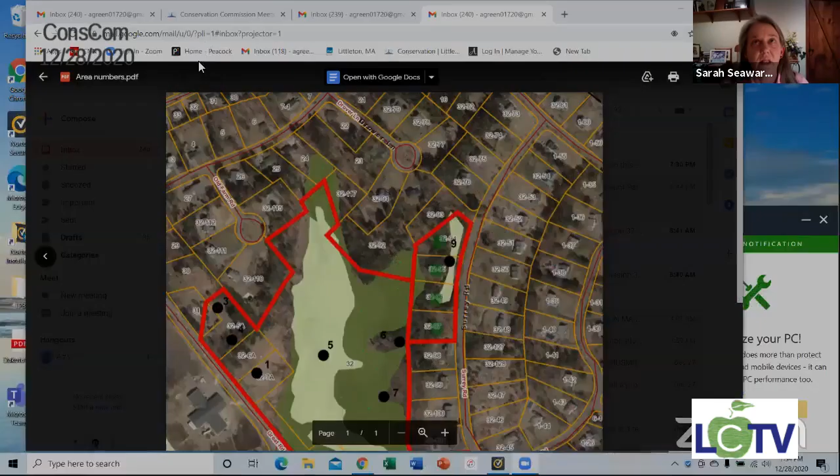Let me see if I... One question, Amy, on that top first page, it says the revision date was March of '17. As you make edits, can we maybe just put that at the last page of the document instead of the first? I like the format though, that's very helpful.

You can tell at the beginning I wasn't really doing findings per se, but once we got into it, I realized we probably should have some backup for that and try to be as consistent as I can be. And these are only the ones that were awarded, correct? The ones where you negated out, that didn't require those — sorry, yeah, I mean I skipped ones where there was no waiver involved. I think I tried to keep track of ones where they started with a waiver but then backed out. There were several of those where they were able to get out of the 50-foot.

I think it would be helpful from a data standpoint, and it doesn't have to be in this document, to have a kind of sidebar document of the ones that applied but were not granted.

Thought there was one or two in there that weren't granted. Okay, yeah, there weren't, I guess I thought there may have been more. I think the only denial has been basically for the vernal pool impact over at 10 Fort Pond. He's putting the driveway in.

Other people may have withdrawn or come in for an informal discussion. Right, and I don't think we need them. Yeah, I wasn't going to put those in.

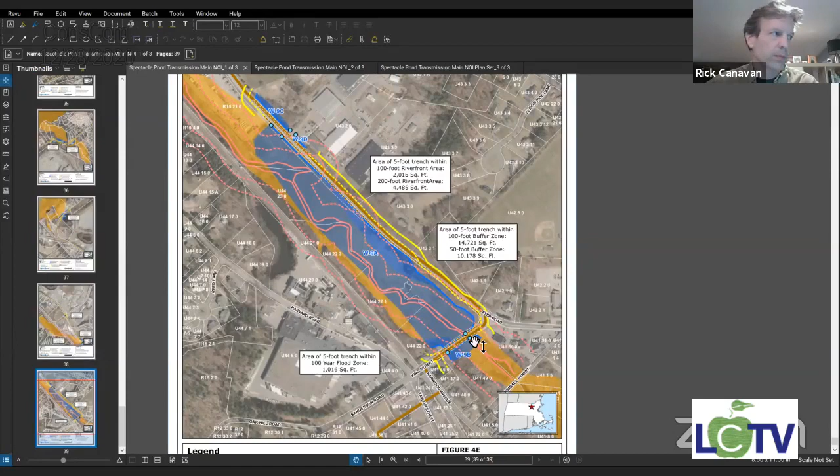You realize they've had a lot of trouble with the gas main along there, keeping that fixed in that area? At King Street? Yep, it's been a challenge over the years, I believe.

And the other one's gonna be getting underneath the railroad track somehow. Yeah, so the railroad tracks isn't a conservation issue, but it is an engineering issue. Like I said, I'm a wetland scientist and not an engineer, but let me get to that sheet for you.

There's an existing pipe underneath the tracks here. So this is to orient yourself and myself — coming off of King Street, there's the King Street culvert, sheet C108.

Oh sorry, well anyways, I'm messing up the match line, so I apologize for that. But there is an existing pipe underneath the railroad tracks that's going to be used — the new water main will be lined through that existing pipe.

You can see in the aerial it's close to the corner with King Street where the survey is showing those existing box cars, so there's going to be no excavation of the tracks. I'm slowly trying to get the trains — getting a closure for the railroad tracks would be very difficult, so they're very fortunate they don't have to deal with that.

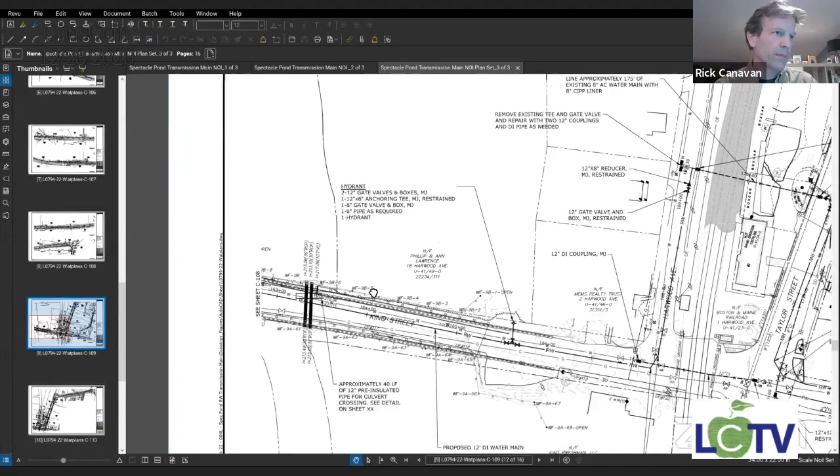And then, like I mentioned, there's portions of the project that are in borderline areas subject to flooding. As I said, that's all being restored to existing grade.

On 2A here, heading, the water flow will be heading south in this section. There's a pretty significant wetland, as you're aware, in this area, in areas where the project excavation is going to be, in the buffer zone or adjacent to wetlands. Even though that's exempt, there's still erosion controls proposed for the limit of pavement to make sure the excavation, the temporary side cast out of the trench, is controlled.

And isn't allowed to migrate into wetlands. Would it be better to be on the other side of the road?

So the erosion controls are on the water side, the wetland side of the road, but part of what they were having to avoid is the existing water mains. The proposed water main isn't this W line type, but it's the RW for raw water. So they are on the east side of the road in that case, further away from the wetland here. But the layout in the road is really dictated by the other utilities, as much as trying to avoid the road shoulder closest to the wetland.

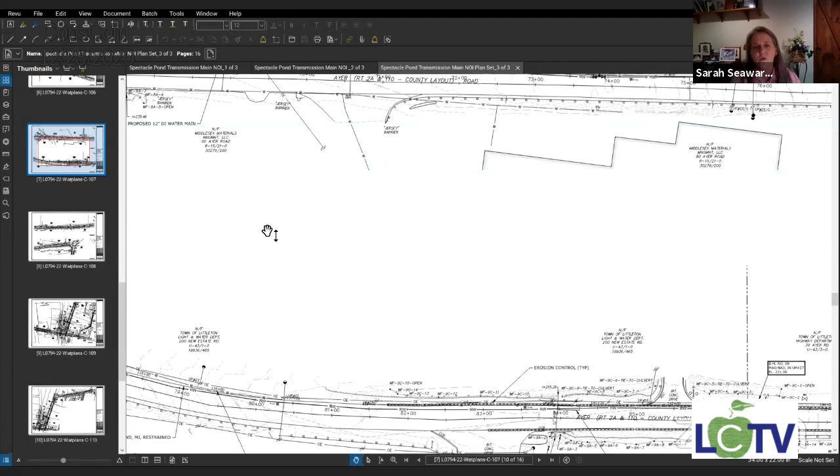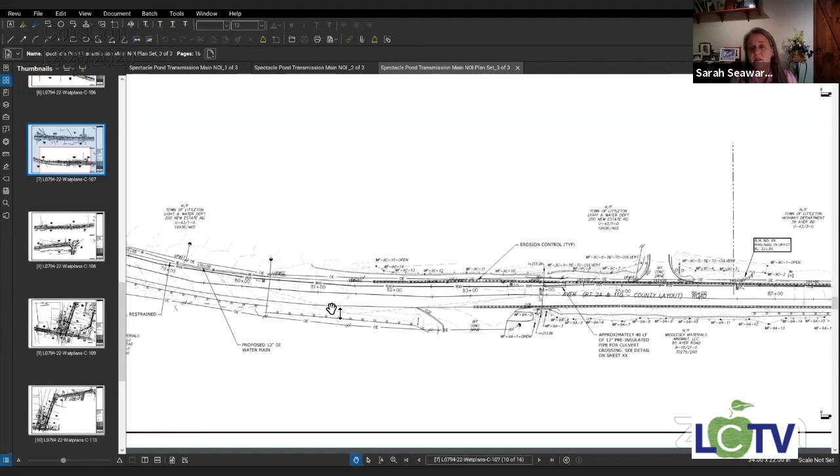Are there particular areas you anticipate seasonally having to dewater? Yeah, I think it depends on the season and the location. Certainly they're going to need to dewater to a treated upland area. I haven't read through the plan fully. Is that noted on the plan, in terms of how that mechanism would be used? Let's see what we've got.

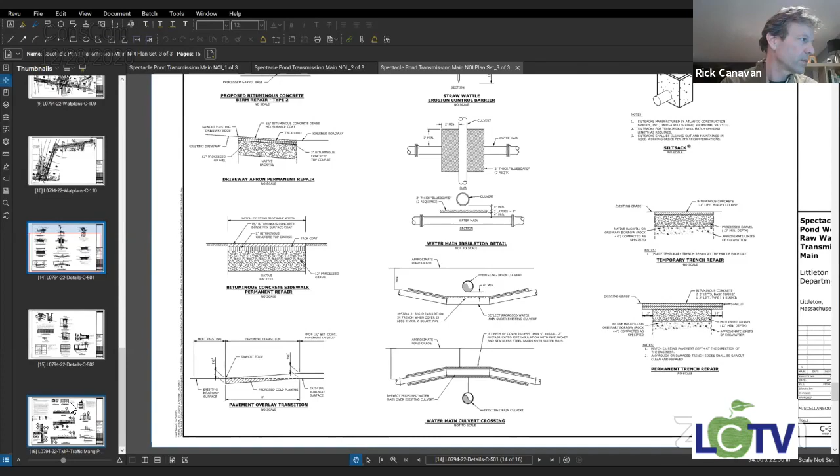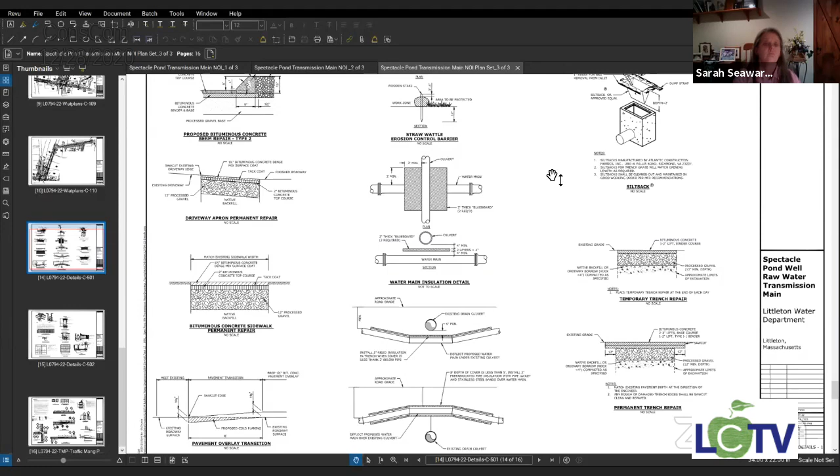This is a detail of the water main over the culvert, but let me see if we also have the sheet of E&S details... That's the traffic one. I know the narrative discusses that dewatering involves no discharge of untreated dewatering wastewater to wetlands. Obviously you want dewatering to be treated and discharged to a stable upland area, so that is in the narrative. The detail doesn't specifically include whether it's one of those geotextile dirt bag dewatering devices or a ring of staked hay bales to put your dewatering trench outlet into, or the outlet of your dewatering pipe. I would encourage you to at least put one or two on the plan, and that can be a field decision, but we'd like something on the plan with a detail.

Is any of this going to be like they did on 119? They did borings underneath the driveways and stuff so they didn't have to dig them up, I think, and they put that temporary pipe over from Spec to Beaver Brook Well.

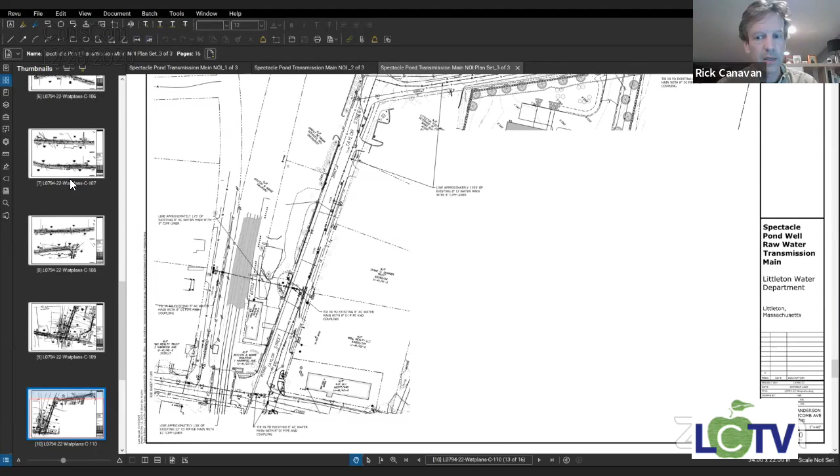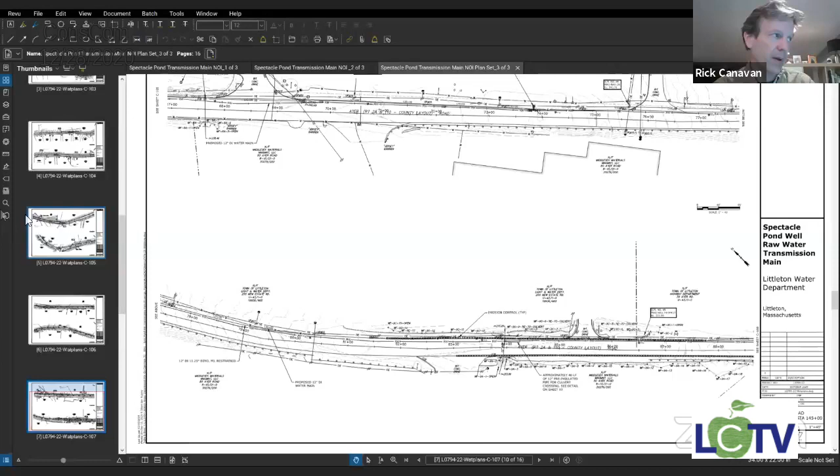If you mean HDD, horizontal directional drilling, it's whatever they did going under the drives. In some cases they did that. As far as I know, this is all trench and open cut, versus pipe jacking or the more elaborate HDD method where you turn your drill head and install a pipe, frequently used to put a pipe under an existing culvert or stream. I'm not aware that's proposed for any of this.

Any of the commissioners have any questions? There's no DEP number on this yet, correct? No. Anyone feel there's any sensitive areas they might want to see or review more closely? I feel like we all know the areas in question fairly well.

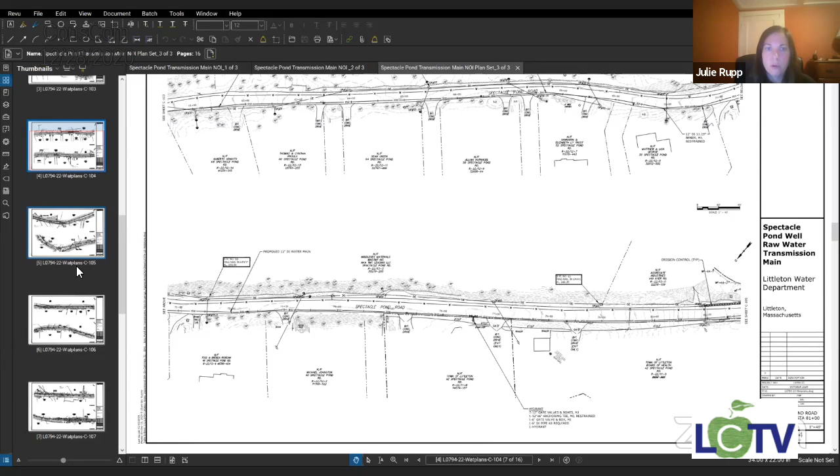Yeah, I could use a little clarification. It looked like where the pipe is coming out from Spec Pond to 2A, it's going to the south side of 2A, and then there's another sheet where it showed it on the north side. Is it crossing? It looked to me like it was heading out to 2A, towards Hartwell, Taylor, that area on the north side, but then one of the last sheets we looked at with Middlesex Materials, it looked like it was on the south side. So I'm just curious, because I was glad to see it on the non-wetland side of the road, since we've had sloughing and issues with DOT recently.

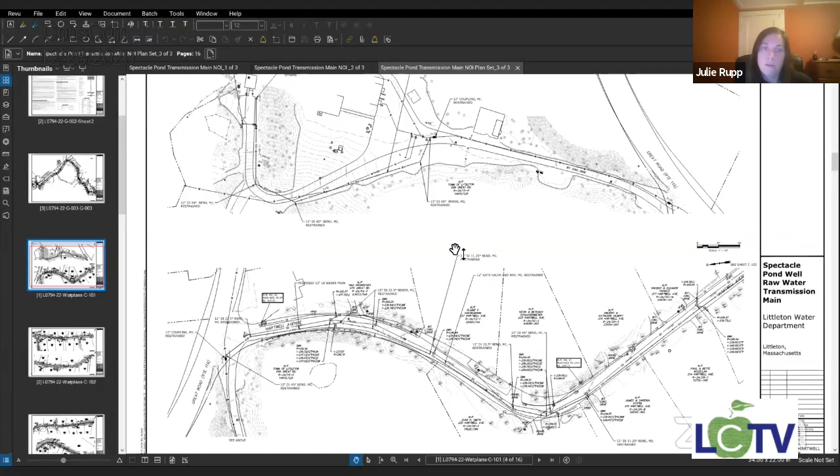Right, so if you want to follow along, here's... and maybe you can help. I'm overdue for glasses, so I apologize. I've brought us up to the north end of the project site, and maybe I've gone too far. If you wanted to look at something in the middle...

It's not really oriented through the internal site drives of the facility up at Spectacle Pond, but as it's moving south, the roads in this section are a little more narrow, and you have the issue...

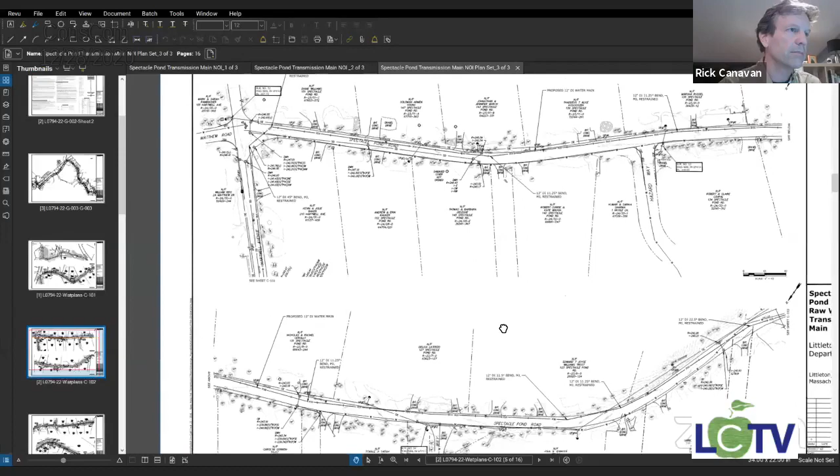I'm trying to get to, I think it's maybe this next sheet, where this is the other crossing in the plan view on the plans instead of the GIS map. So the raw water line is avoiding an existing water main here. It's more to the middle of the road because there's wetlands on both sides, and that's something you're kind of stuck with, trying to avoid the other utilities. In this case there's both drains and a water line, and they're splitting the difference, staying in the middle of the road.

So the design decision of where in the road the line is going is avoiding existing stormwater drains, existing water line, as well as trying to avoid wetlands, and keeping the geometry of the pipe feasible to build. So the bends, it's better if they're not very sharp, trying to make the radiuses work. So all those were factors in the decision of how the layout of the pipe has been designed.

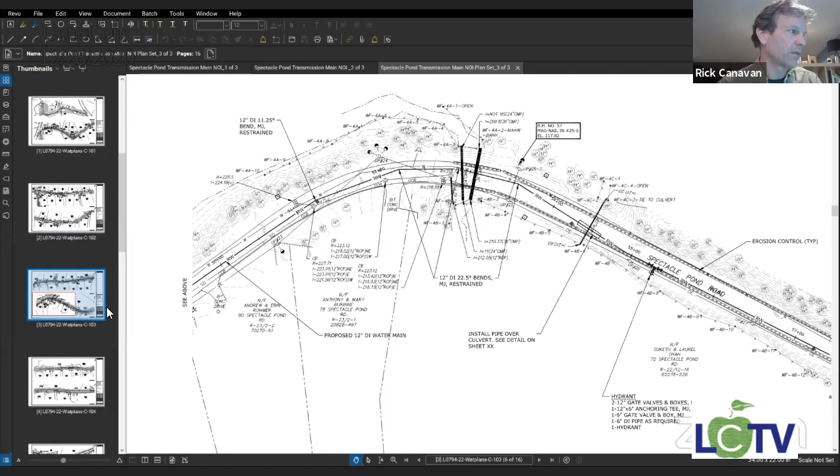I'm not sure if this is still the area we're looking to see, or if you want to help me get to the spot you wanted to go to. Yeah, I think I'm more just curious about the 2A crossings and where you are on 2A relative to the large wetland there and Middlesex Materials.

Did I miss that? Actually the explanation you just provided was helpful, because it looks like a road crossing is just kind of a diagonal across a road rather than a 90-degree type of thing. Yeah, that's like the hydraulics of water flow in pipes, which again I'm not an expert on, but the more shallow the angle, the better for the flow in the pipe.

Yep, that makes sense. Hi, Rick. Just joining you. Hey, Lou. Sorry. That's all right. So Lou, this is Lou Soracco, who's an engineer with Tighe & Bond. Lou, I was just pretending to know about fluid dynamics and pipes and why you'd use more shallow angles, but...

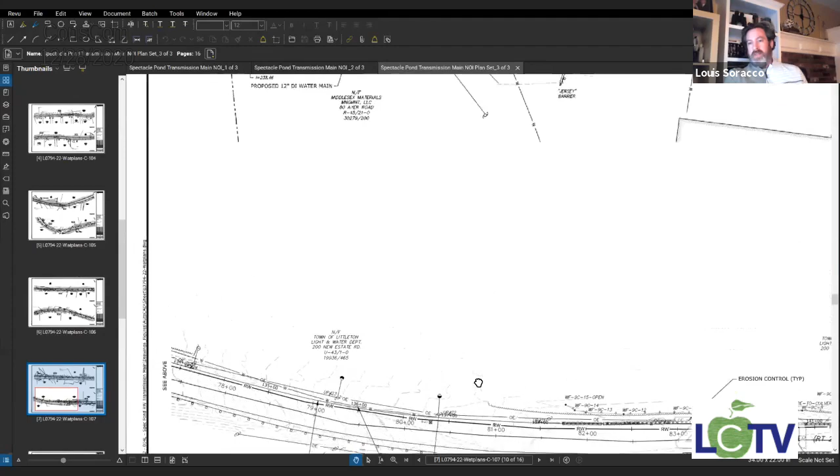Sure, yeah, no, you're right. The 90-degree bends, we don't really use those in buried pipeline applications if we can avoid it, because there's a lot of head loss through 90-degree bends. You get a lot of thrust at those joints, so you need larger bearing surfaces to make sure the pipe doesn't shift underground. So for a variety of reasons, we limit the bends to 45 degrees. When we need to go around something, we'll use a couple of 45-degree bends. There'll actually be less of a hydraulic impact using two 45-degree bends than one 90-degree bend, so from that standpoint we'll avoid that.

Underground, they come in standard 45, 22, 11-degree bends. And then each pipe segment itself has a certain degree of flexibility where it connects to the next piece of pipe, so you'll get a couple of degree bends just by connecting straight pieces of pipe together. A lot of times you can bend around objects without putting bends in the ground, it just depends on if you plan far enough ahead and how exaggerated the bend needs to be.

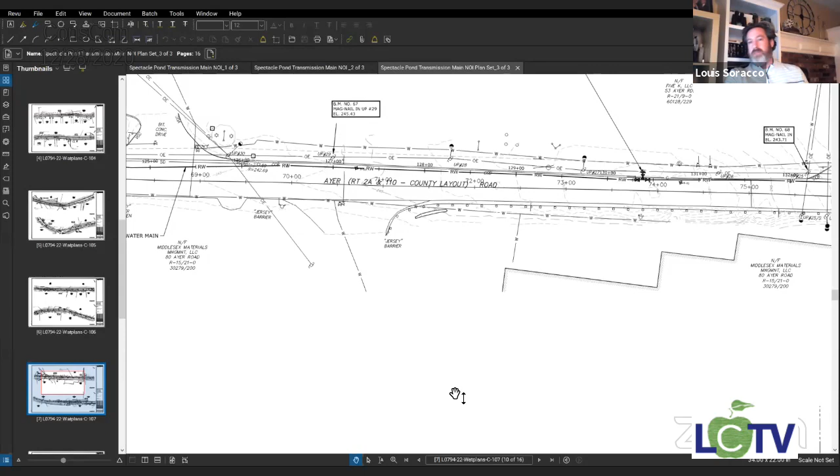But we usually show a number of bends in our designs so that the contractor is prepared to install them if they find conditions are different in the field and it's more easily maneuverable without bends. We can make that call in the field, but we try to conservatively show the number of fittings they'll need to make the installation occur.

What size pipe is this, by the way? It's all 12-inch ductile iron pipe.

Your plans show you mentioned thrust blocks. They're all precast? Is that what your plans are showing? Yeah, the water department is kind of standardized on precast concrete thrust blocks, so they would like to go with that wherever possible.

I had one other question about hydrant installations. There's a detail for that. Are there hydrants being installed along the line, or only up to the start?

I didn't catch the whole question there. It sounded like a question about hydrants. Is that right? Correct, there are a number of hydrants. They're not being used for a typical hydrant purpose. This is a raw water transmission main, so the hydrants are there mainly at high points to help release air. When the pipeline is initially filled, we need a place to evacuate the air out of the line so we don't create an airbound situation with an air pocket in there. And at low points, there's a couple of low points where we just want to be able to flush out periodically. But for the most part, hydrants really aren't needed, and the pipeline isn't really even under pressure unless the well is in operation.

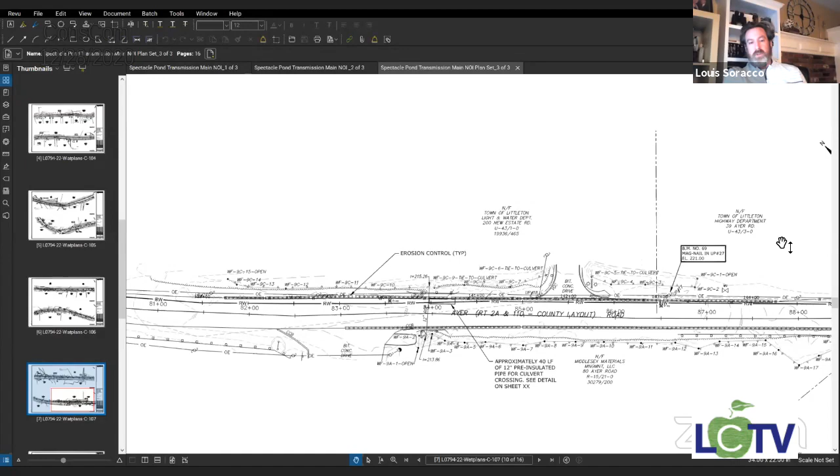But they will be standard type hydrants where we do have them, but they'll be painted a different color so that they won't look like the normal ones. They'll probably be painted black so that they're not confused as a regular hydrant.

Mr. Chairman, I'm not sure, you might have some people in the public with a comment. I don't recognize everybody out there. Yeah, I guess we should speak to whoever would like to talk. Nope, I guess not.

Okay, Rick, are you impacting any trees? Or it sounds like it was mostly or all currently under current paved surfaces? How long do you expect to tie up the roads?

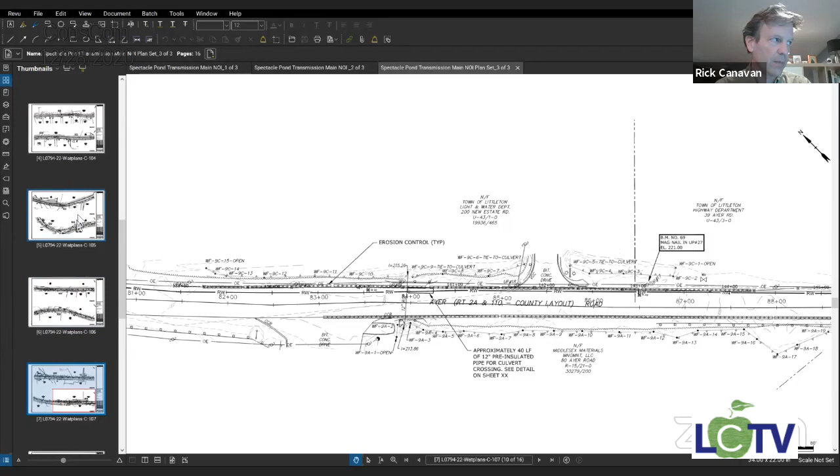Lou, can you confirm, as far as I'm aware, maybe the only place there could possibly be any tree impact is this initial section out of the well at Spectacle? Are you thinking any kind of clearing? No, there'd be no need to take any trees out around there. There might be some low scrub, but nothing substantial that would require a large amount of specific removal. There's room enough where we've shown it to avoid any significant tree clearing activities.

Otherwise, construction equipment access should be occupying the same space that you'd need to clear for the road itself. I know the water department is scouting out a few different areas for staging purposes along the route. Obviously this is one of them, their own property here. There'll be an area at the other end. There's their office that's in between along the way that they're going to be used. And I think they were going to speak with the town to see if there was any area in or around the transfer station, to try to give them different points along the way to store materials for staging purposes.

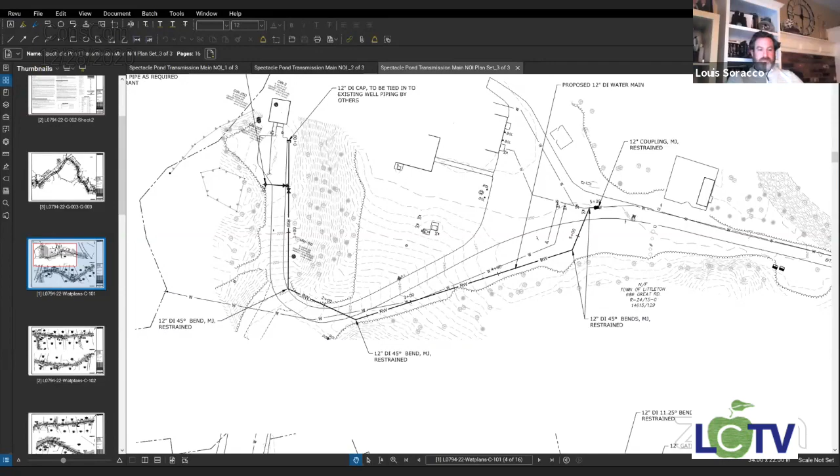Okay, thanks everybody. Continued public hearing request for amended order of conditions, 93 Matawanakee Trail, U4725-0, Mass DEP file number 204-876. Who wants to speak to this one?

Well, I think we can do an update. After the last hearing, Amy and I went outside and met with the owner and took some photos there. It had been a while since I'd been on property, so I was personally surprised to see how close it was to the water. I'm not sure, Amy, if you have any photos to share, but I welcome other commissioners' feedback on that. I saw the numbers coming through on the 10-year storm, and I feel like presently we get 10-year storms in the spring and summer quite often, so that is certainly a concern of mine. I think the original intent was that we were going to really be able to absorb more naturally through not having pavers and everything there.

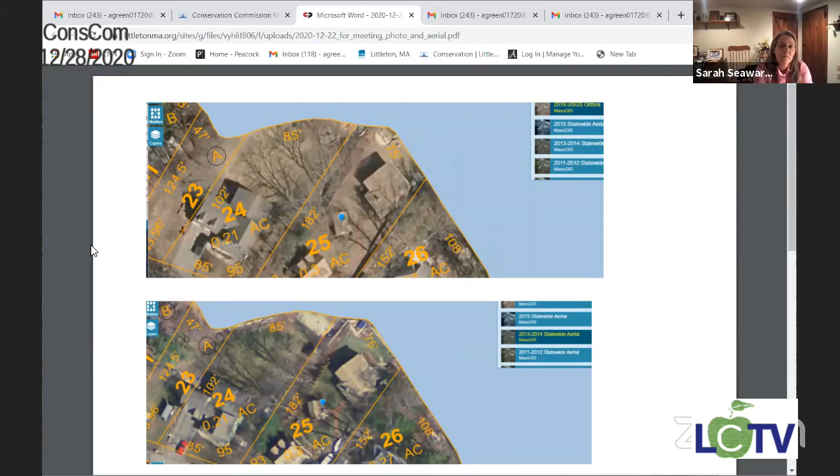So this aerial, let me think about this - the top one, where am I? This is existing conditions. Up here you can see the pavement, and this was before anything was done - you can see the lawn in there. So that's the change, and that's just sort of a reference photo.

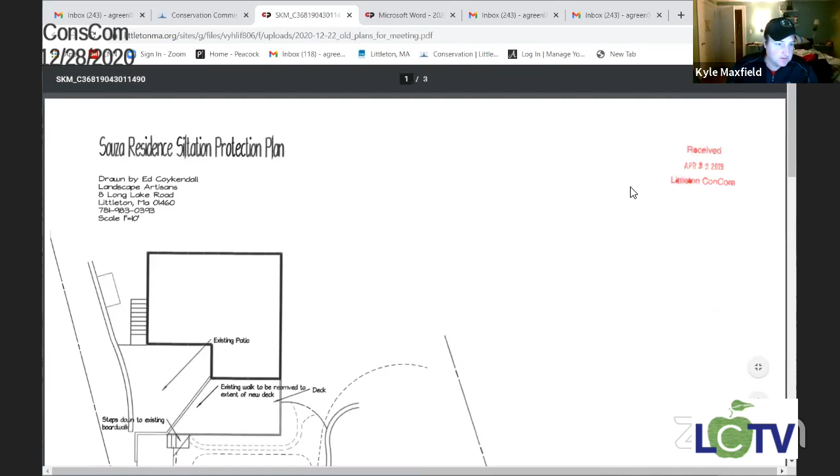Can you remind me what the plan was? From what I saw when we walked out there, the plan was a wood deck that wasn't supposed to extend as far as this patio, correct? Kyle, your audio is not working wonderfully. So this is the approved 2019 plan - here's the lake at the bottom. This is what would have been the rain garden, and the new patio is in here.

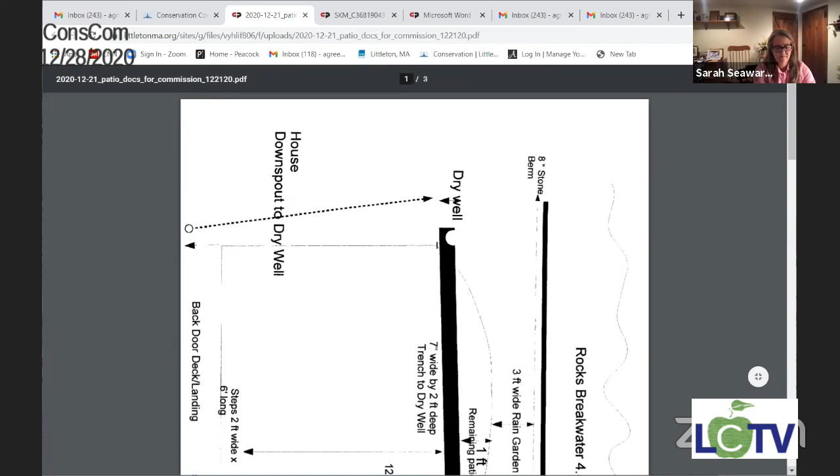So how much bigger is it than what the original plan was? Well, I think it's not that it's bigger, it's that it's different, Jim. It is closer to the water, and the rain garden is half the size. Just trying to find a picture from that day. Mr. Souza took these dimensions after Sarah and I walked it - the rain garden as built is about 3 feet wide, with about a foot to the patio, and then the patio up to the house. Then the scale is kind of useless because it says 1 inch is 10, but I don't know what 1 inch is on this. Definitely a lot different than what we were permitting, as far as I can see.

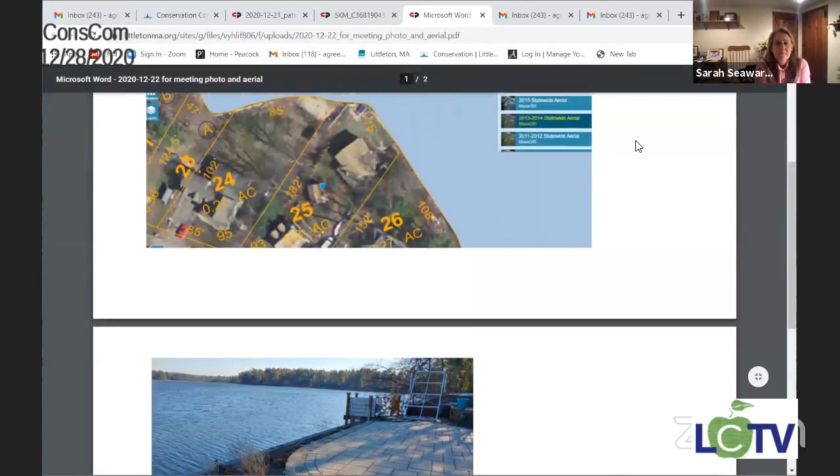I also noticed that on the opposite side of the property, there's a direct discharge flexible black pipe that has a direct discharge onto the beach as well, on the further side of that deck. I thought I had sent a picture of that - I was just looking to see that now, and I thought we had addressed that in the filing. I did not see that in the original filing. Sarah, do you know what the origin of that pipe is? Well, maybe the applicant can speak to that, but it's drainage.

Well, it's also roof runoff, right? Isn't there a leader from about halfway up? Yep, you could see the scouring, and that was not after rains. The flexible pipe is connected to the downspout off the side of the house. So you're getting good force for sure.

Other commissioners have questions, thoughts? So the edge of the patio, it sounds like it's now 4 feet from the lake instead of the 8 feet that we had talked about when we permitted the plan. Is that accurate? I think I saw you nodding your head.

Yeah, I believe that's accurate. Okay, yeah, and so that was my concern when I saw the photos with the edge of the patio and the garden. And then the other concern is that it's pavers, which is very different from the decking that we permitted.

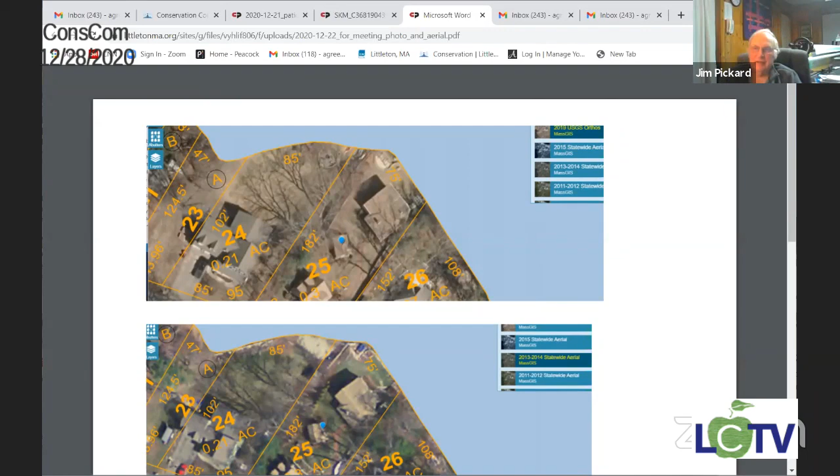What is your recommendation? Take it out? So could I ask a question? So preventing the stormwater from reaching the lake at all is not sufficient or not reasonable in your view? That that was the intent of the trench and the dry well, was to basically prevent any stormwater from reaching, even reaching the rain garden.

And I would be taking out some of the patio in order to put the trench in. So the patio would be a little bit less towards the lake because I'd be taking some of it out. Right, so I guess I made a mistake and I'm trying to make it right. And it sounds like I'm failing to do that.

The issue is that the current project, even with the stormwater infrastructure, never would have gotten traction. And if your neighbor comes to try to do this, it just never would have gotten traction. And again, what we permitted is not at all what's existing. I understand.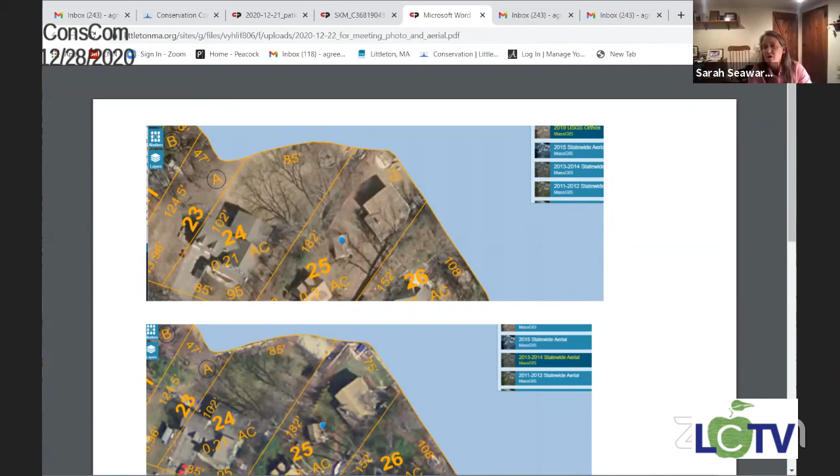Other commissioners want to speak and share their thoughts for Mr. Souza? I'm sorry, say it. No, we're just asking Mr. Souza for other commissioners to comment for you. Okay, yeah, unfortunately, I'm on this one, not unfortunately, but I agree with Julie. I wasn't around when this got permitted, but I can't.

You're just still looking at the proposed plan and looking at the rain garden that was proposed. Even if you would put in a patio mistakenly instead of the wood deck, the rain garden itself wasn't even built to what was on your plan. So we're losing, never mind just infiltration, just the habitat and the top pollinators that you would have put in there. I don't think you have even the room to recover from what was on this proposed plan, other than to remove more of that patio.

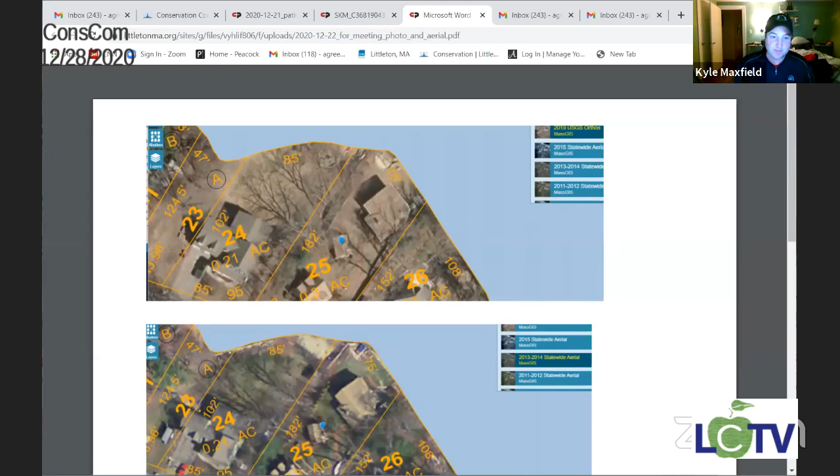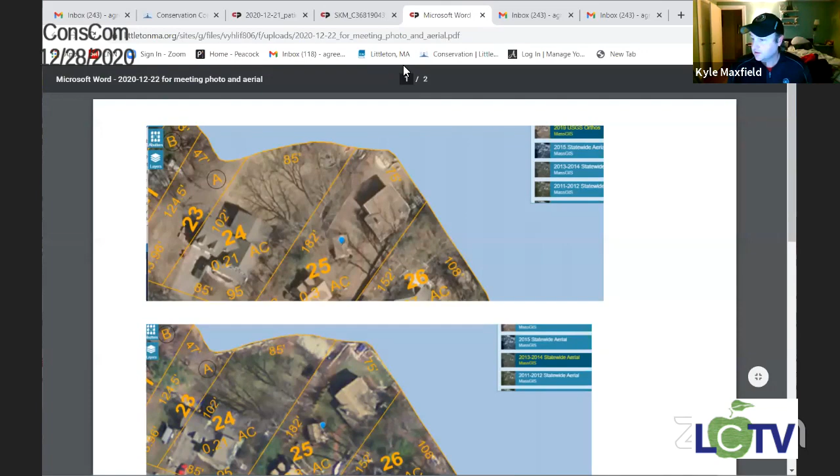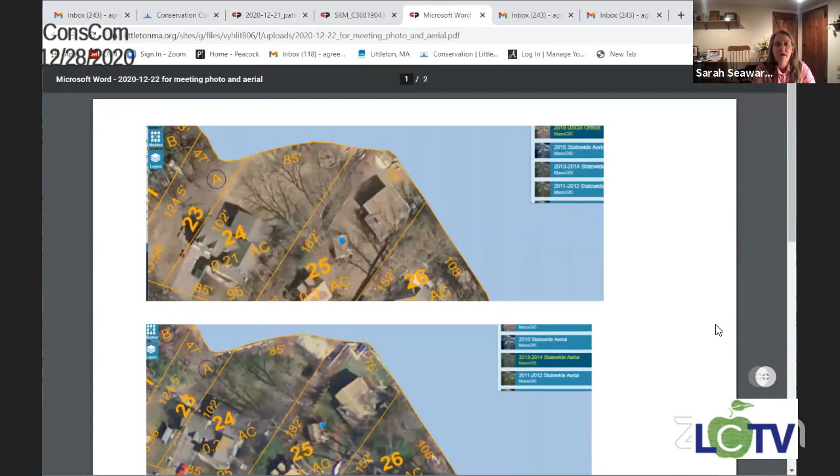But I mainly agree that I don't see that initially we would have approved a full paver patio, especially covering that much area of lawn that was pre-existing. I think my hope had been that there would be more infiltration in its original state, without having the pavers there. I just think that our storms are getting to be so ferocious that the water's just going to bounce right off it, that we wouldn't be able to accommodate it. Even looking at the numbers, and I appreciate you sending the 10-year storms, I don't think that we can accommodate that even on this site.

So what is the solution? Would it be possible to maybe remove a portion of the patio and increase the size of the rain garden a little bit, along with maybe some additional drainage? I think you'd have to remove the majority of it, Andrew, to even get back to any type of true infiltration. So I agree with the other commissioners, it wouldn't have been permitted.

I think there's an ongoing issue too with when you inevitably get vegetation growing up through the cracks in the pavers. How do you deal with that? Are you going to be on your hands and knees removing it, or is someone going to spray vinegar or herbicides? So that's an issue as well.

That's one example of why we wouldn't permit this type of surface this close to the lake. And really, the only reason that anything was entertained at all was because it was decking on posts with drainage through. Yeah, that's a good reminder.

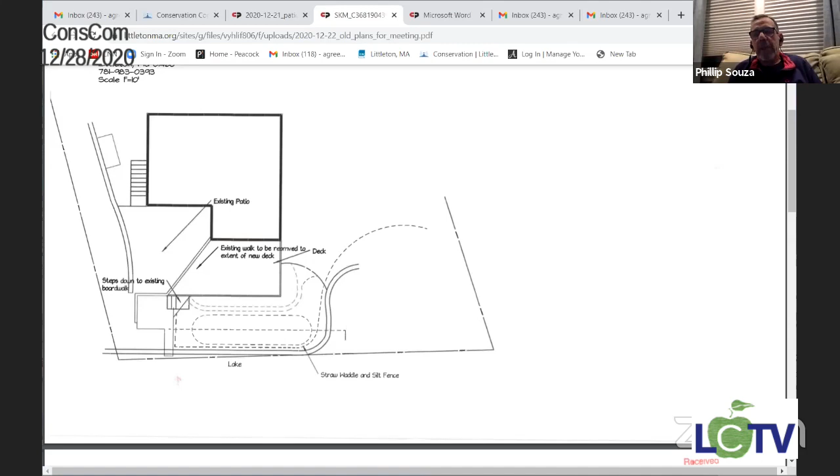Is there a way to avoid tearing the entire patio out and instead of every other paver having a drainage site, including the trench in front, the rain garden, and the dry well, so that instead of a stone paver there'd be grating where the water would flow into, as well as flowing into the trench at the end of the patio?

I think what you're hearing from the commissioners is that more than likely that too would not have been approved, because it would have exceeded what's allowed — that would have required a waiver.

We went around and around on this to get it so you could have the wooden deck. That went on for a couple months. That was what was proposed. Correct.

So we need to move forward on this to give Mr. Souza some guidance. We have a few options put out this evening. What would commissioners like to do? We need someone to make a motion. Sarah, do you want to make a motion to have an enforcement order issued?

I think, while Mr. Souza, that sounds extreme, it does give the commission an opportunity to work with you in terms of pulling it out. Our concern is that if we do not put an enforcement order on, we have very little skin in the game to make sure it gets done properly.

But we are very cautious to set precedents here — this would not have been permitted so close to the water. If you were 100 feet back, or closer but past the 50-foot line, that would have been a different discussion. But you are so close to the water.

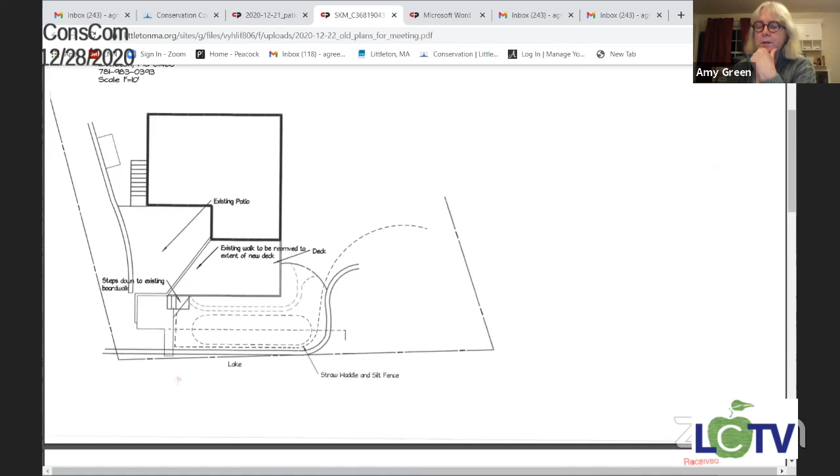Yes. And before you vote, I'd also want some clarification on the timing. I would be a little leery about ripping this out in the winter. I agree. What do we benefit from trying to pull this out while the ground is starting to freeze?

Personally, I'm more in favor of just leaving it alone because it's going to wash out. That's my opinion. I agree. We would leave it and readdress it, to have dialogue, say the beginning of March, so that we know going forward we have a plan.

And in the meantime, can we discuss the plans with Mr. Souza? I think we also need to talk about erosion control, and about that downspout from the drain, because that's going directly onto the beach. We need to try and slow that down.

But in the next couple of months he should be getting his plans together, with a contractor lined up, because there's going to have to be a new plan with erosion controls and what that's going to look like afterwards. So Amy, is that motion clear? It was obviously not for the deck, but for the patio.

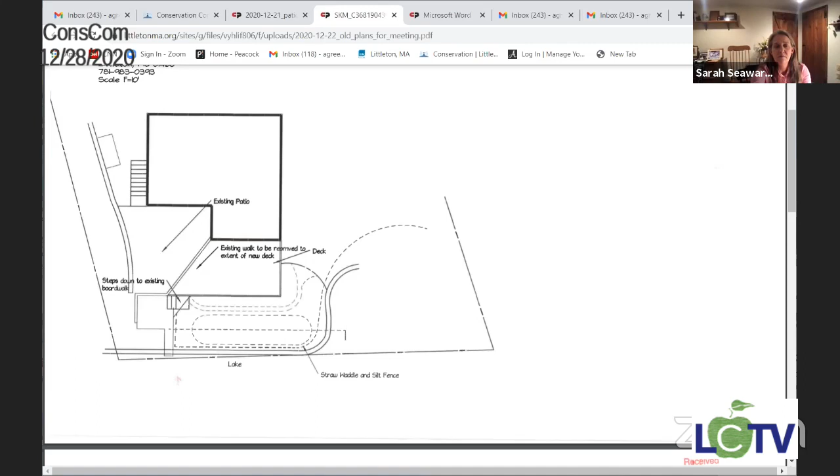So, Brad, you want to do your roll call vote? Sure, one sec. Trying to remember who we all are. Yeah, I'm trying to find the order. All right, you probably moved it. Yeah, I moved it, one sec.

So the plan really is going back to the original plan, and at this point the staging is probably the most important piece of that — how to get there. All right, Brian, we're ready. Yep, I'm just bringing it up, sorry.

Okay, so we have roll call to issue the enforcement order. Melberg is absent. Sarah Seaward, yes. Kyle Maxfield, aye. Brian Crowley, aye. Andrew Samarco, aye. Jim Pickett, aye. Julie Rupp, aye.

Moved. Okay, you issue an enforcement order.

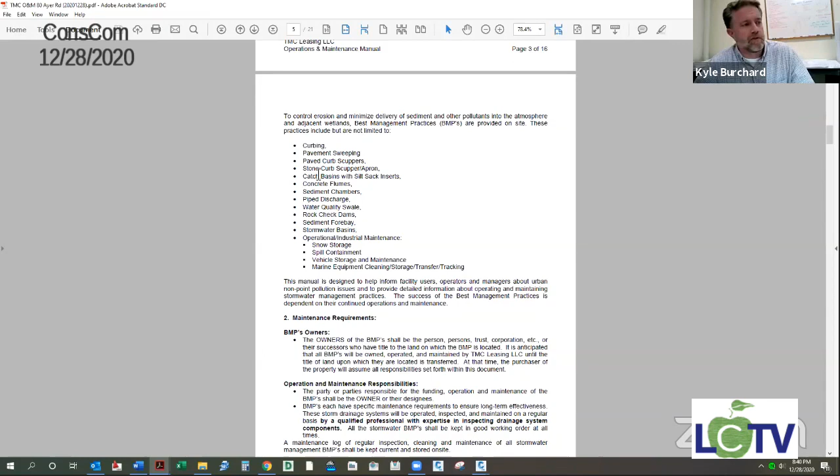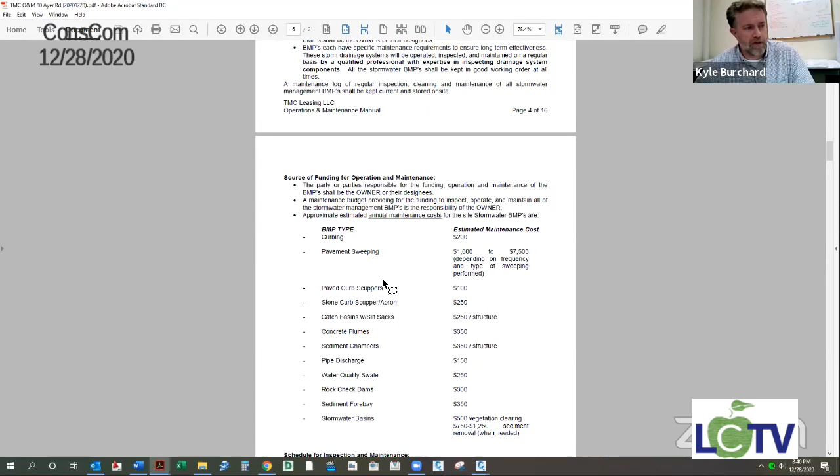We talk about all the basic components of what helped this stormwater system to function properly and clean the water as it runs off of this industrial property. There's a whole host of different items that we've identified, as well as some practices for best management of the site. We have an estimated cost of the annual maintenance of these BMP facilities and a schedule that will also align with the multi-sector general permit requirements for minimum of quarterly inspections and annual reporting. And of course, there's maintenance as needed at various facilities, which will be based on the inspection schedule.

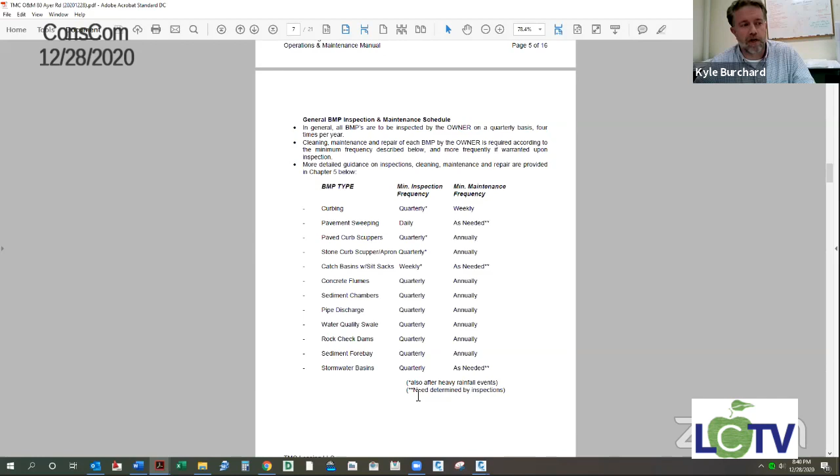I understand that the commission hasn't seen this, and I appreciate the accommodation to just walk through this very quickly. Stop me whenever I can answer any questions.

First and foremost, I'll just point out number 12 is the snow storage area. I think that the facility manager had worked with Amy a little bit to identify these areas outside of the buffers, the flood zone, the riverfront, to be able to provide snow storage up along Ayer Road. That's typically how they've done it, and that's currently how they are continuing to do it. Now we've included that in this O&M just as a mention for one of the items that try to help make this facility run in a clean manner as it pertains to stormwater runoff.

So we have a number of different pieces of infrastructure that go into the existing stormwater quality system that's on this project. If we're oriented to where the concrete batch plant is on the property, there are a couple of concrete flumes that have grates on top of them, separated by a well of sorts, a sediment chamber, if you will. This one is somewhat shallow, but then it overflows into another concrete channel before being piped through another chamber. And there's a host of other chambers right before we get to the existing detention basin that's out there.

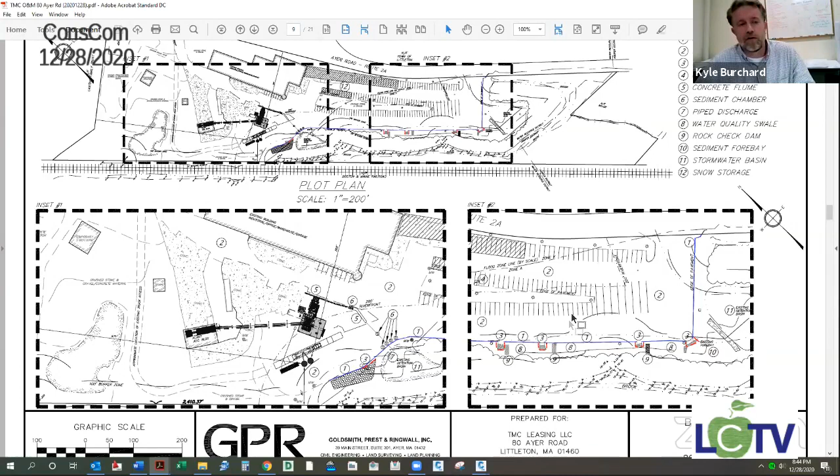But also just note, curbing is the number one item listed in this, as this entire barrier along this southwest edge of the property is a major component of maintaining the proper water quality runoff from this site. So making sure that the curbing is in good shape, that where it's scored or broken or cracked, that it's replaced. We also know the new installation of curbing along the Jersey barriers adjacent to the existing detention basin is also part of that maintenance schedule.

So we have the curbing that's controlling the water at specific points to get off the pavement. There will be wattles or silt fence there to capture the coarse sediments and debris, making it more convenient to remove before it then goes through the water quality swale and the rock check dams to get to the existing forebay, spillway, and existing detention basin. So that's one system on that end of the property.

In this middle section, where arguably there could be more runoff from the concrete batch plant, the aggregate building, and where the proposed scale and silo equipment is going to be placed, again there's a scupper to a stone apron where there would be a place for straw wattles and or silt fence to be placed to capture the sediments before it crosses again across another filtration mechanism in this stone apron to then get into the detention basin.

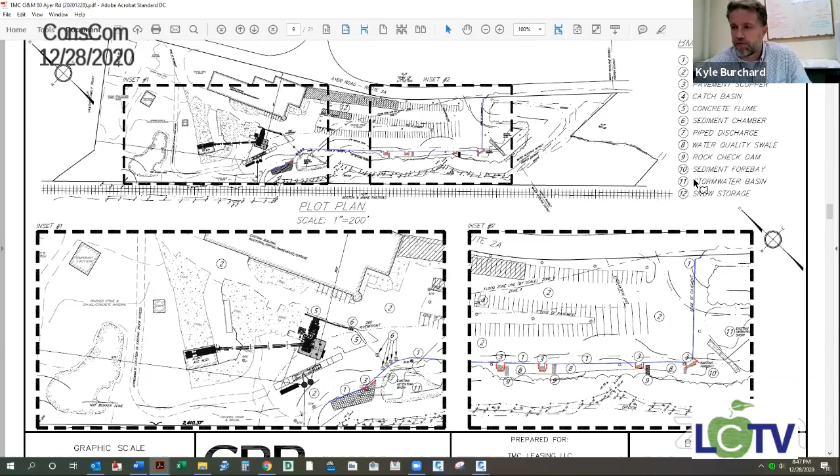So we would be proposing also to do some sediment removal as part of the maintenance of these basins, that's been added into the O&M plan. So with that, I think I'd like to see if there's any questions from the commission, looking to move forward to try to help our client get to construction. There's this process for building permits and so on. Like I said, also the multi-sector general permit is something that we are also advancing to get submitted to the EPA.

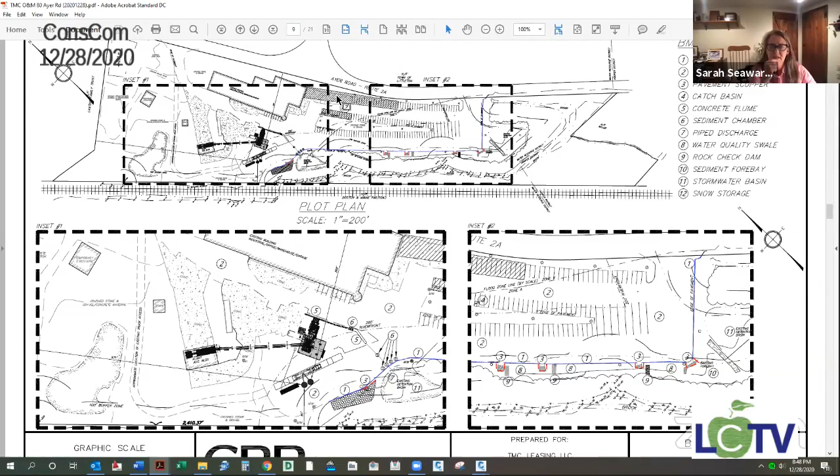Okay, Kyle, I have 3 questions and they start in the order to which you shared for snow storage. If you can go on there where it has number 12, where the snow storage is. Can you remind me where the fueling is of the trucks that are there? Isn't that where the 12 is? Aren't there some pumps there for fueling somewhere in that area?

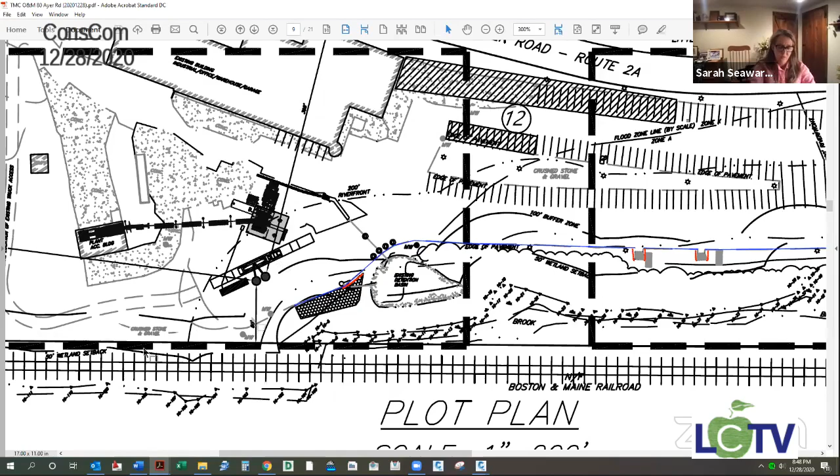There may be. I don't know that those are active. Okay, if you could just let us know if those are active or not. And then as we go over closer to your batching area, I guess I still get a little conflicted because we talk about it's fairly efficient, but then we've been on site numerous times and we really do see quite a bit of surface overflow kind of coming down between 5 and 6. And I think we've talked with Bruce about that, the previous engineer. So that's definitely a concern of mine. We saw that on some of our site walks.

I just want to clarify, if I may, the 5 and 6, are you saying sheet flow? Just in that general area, Kyle. So I was just trying to make it so when we were there, we could see, we were there during a rainstorm and you could just see the sheet flow across the pavement coming down to this point. And I think, Brian, that was the day Brian and Kyle, we were all there with Kevin, that we saw just the water just kind of cascading down over the parking lot. So there is sheet flow.

There is sheet flow that happens in this area that brings it to this point, which is, I think, why there is a break in the Jersey barrier and then a stone apron to allow for a stable transition for that water to get out off the pavement and get into the basin.

And that's its function. Looking at it, it's fairly flat across here, and I recognize that. I think that may help in slowing the water down as it gets off the pavement, and providing a measure of pre-treatment effectively with the wattles that are going to be placed, or the silt fence that's permanently stationed at this break. So I agree.

There's flow that occurs here. I'm not sure, so I guess to clarify, are you saying the permanent solution for this will be erosion control? Well, the permanent solution is that erosion control is a standard measure to protect the BMPs at the transition of the water off of the pavement. There's a large stone area here where that takes place, and then that transitions and conveys into the basin.

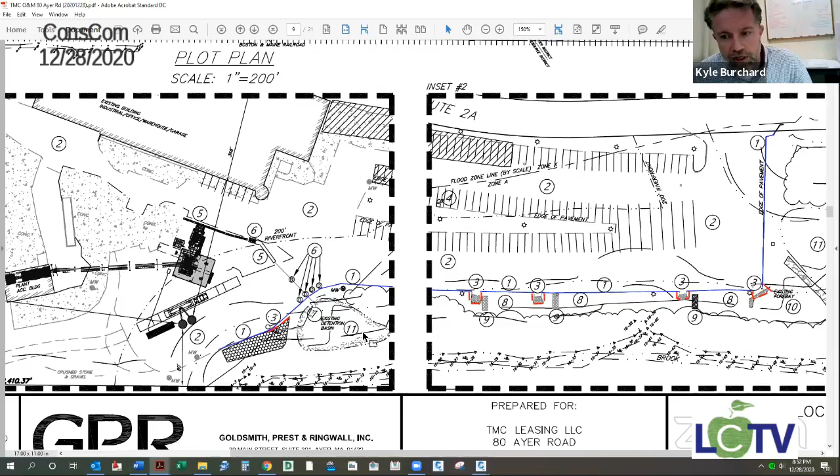Okay, thank you. Do your BMPs have a threshold? I know we went through that list fast, timing and whatnot. So I'm sorry, I can't understand what you're saying. How frequently do those basins get monitored for sediment? The way we've set it up in the O&M is, I think, on a quarterly basis. Stormwater basins will be inspected quarterly and as needed.

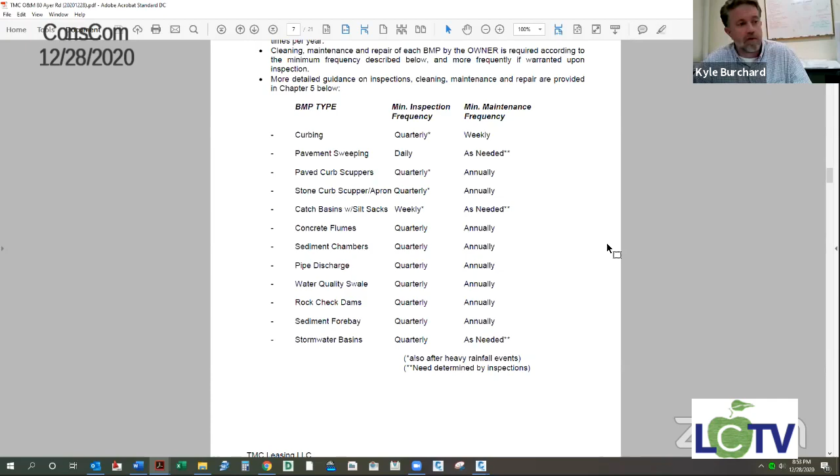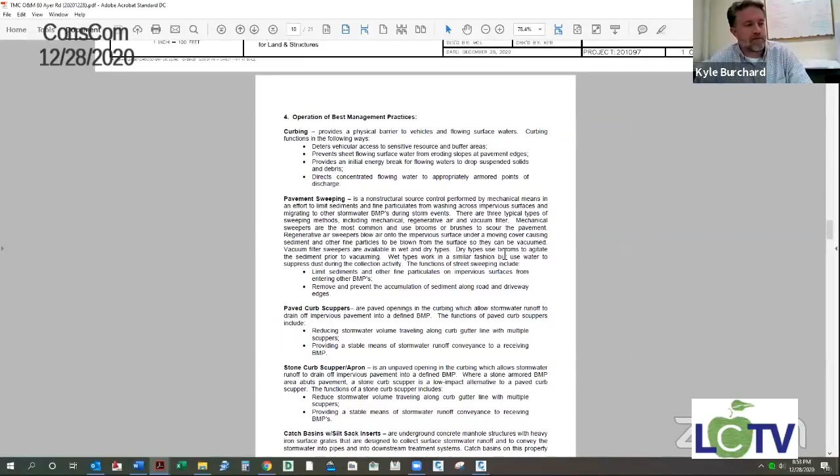So does it need it now, or in the very near future, conditioned perhaps to be done in the spring? And what is that threshold that it would need to be done at? I imagine it's not a foot. Well, I think what we're calling out for is to have it done when there's 6 inches of sediment that might be collected over 3 months.

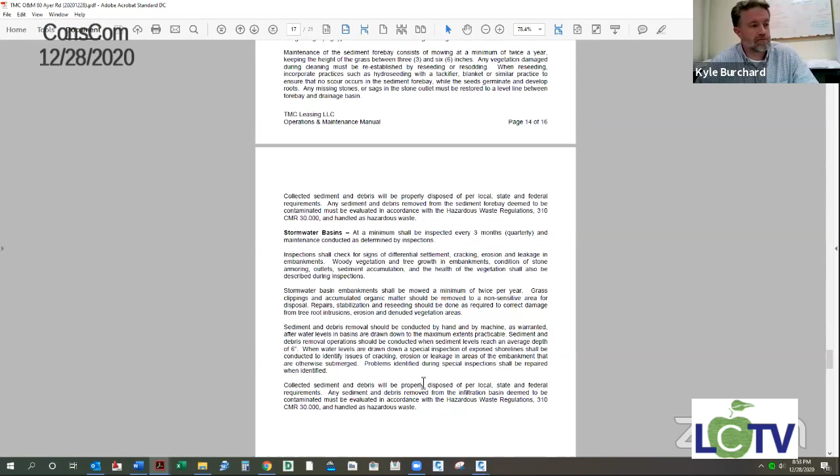When you say sediment forebay, you've got 3 to 6 inches, right? Keeping the height of grass at 3 to 6 inches. But I thought you had 6 inches, Kyle. We have 6 inches in the sediment basin, so when we're detecting 6 inches of sediment, that would be the trigger to move the sediment out.

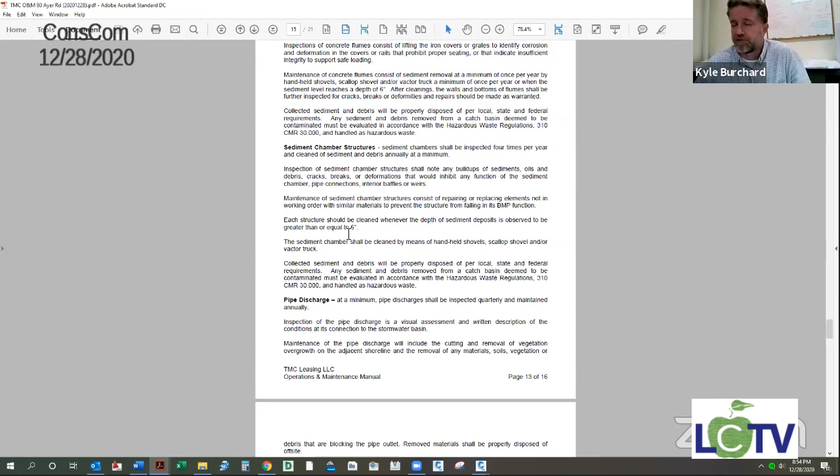We also have 3 to 6 inches within the sediment forebay that goes to the south basin. And I believe in the sediment chambers as well, another 6 inches. So we're trying to keep that level down to roughly 6 inches all along that pathway. There may be more frequent cleaning in the sediment chambers leading to that, or in the water quality swale and forebay that go to the southern basin. That seems like a reasonable amount of monitoring to keep that at bay.

You said it, but I want to emphasize it. There's no reluctance to clean out these basins, but we are under a timeline to try to get this facility permitted and ready to go at the beginning of the season. I'm not sure that doing the sediment removal now is the right time. I would think you'd want to do it when there's less flow going through those basins, less chance of any sediment going downstream.

I mean, I think if the requirement was that it has to be done before this gets permitted, our client would go ahead and do it. I'm just not sure it's the smart way to go, but if we need to, we will.

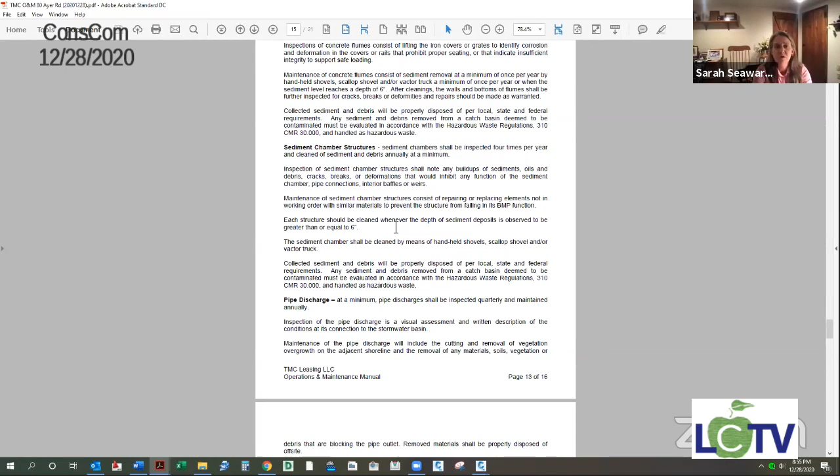Cal, can you introduce yourself for the commission, please? I'm sorry, yeah, my name's Cal Goldsmith. I'm one of the principals of GPR, Bruce's partner from way back when.

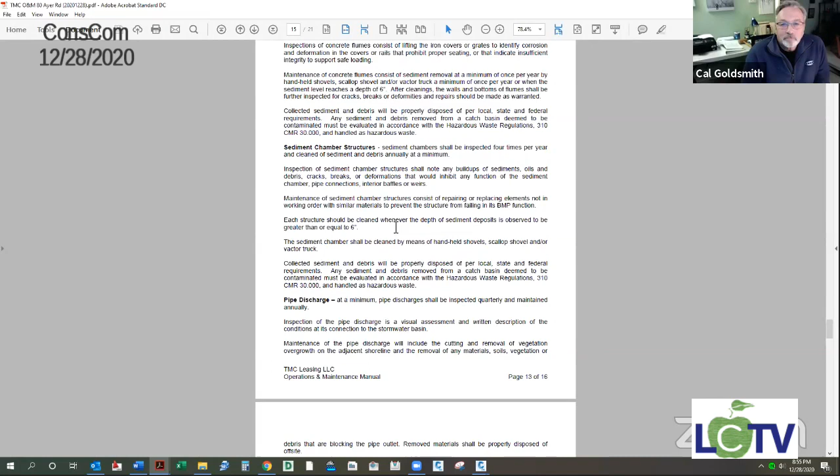So, given that it's been a while, a vacuum truck - there are ways to clean them out without entraining as much, if you were to shovel it out.

And then it seems to me that quarterly inspection for a site like this, when we're in the situation we're in, we don't really have a good idea. I mean, I do agree quarterly on a typical site is perfectly reasonable. On a site like this, where there's a lot of fines, the materials they're using themselves will silt up the basins, as well as any sand used on the parking lot, truck tracking from the roadways, etc.

It seems to me, as a start, I would prefer the inspection to be more frequent, and then once they get a better handle on it, because there are likely seasonal variations - if we get large rainfalls for one season versus a drought. We had a drought all summer. It seems like it would make sense to inspect it more frequently to start.

And you can write that in your O&M plan and say we'll inspect it monthly, and then evaluate in a year and perhaps step back to bi-monthly or quarterly - quarterly in the summer and bi-monthly in the winter, something like that. That's easily done, sure. There are differences.

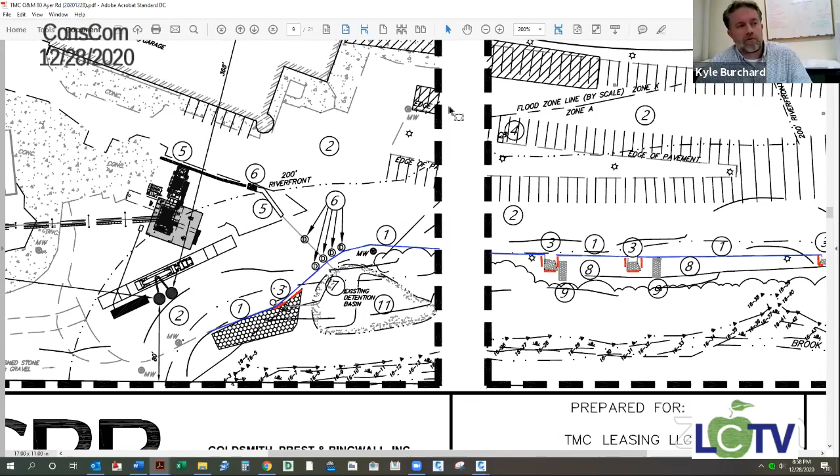There's a monitoring well near it. I hadn't thought there was one. Oh, I see it - actually it says MW right there by the edge. Okay, so that monitoring well, is that a stick-up or a flush mount? So it'll be flush mount. Okay.

If you need to access it while there's snow on it, that's something that will need to be considered. There's a lot of large equipment on the site, and they would be able to move this snow. Yep, okay.

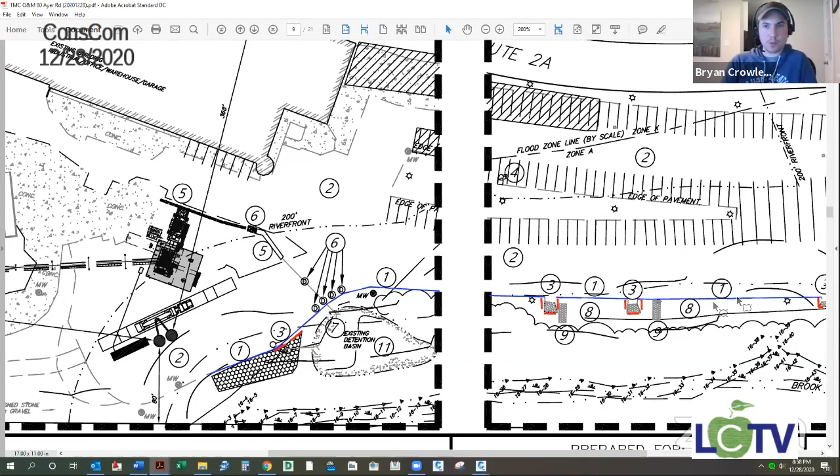Kyle, does this O&M plan talk about equipment storage or equipment washing, or is that addressed in another document? For equipment washing, there's a washout area for this that's kind of a separate aspect - there's an area where the trucks are backed up, open, and there's a trough that exists here that is part of that separate operation, outside of the buffer areas and so on.

But it's an area that has a trough washout in one chamber that has an overflow into a secondary chamber, and then there's a tertiary chamber as well, so that all the water wash-off from the trucks gets recycled into the concrete plant, used in the mixture of the new wet concrete.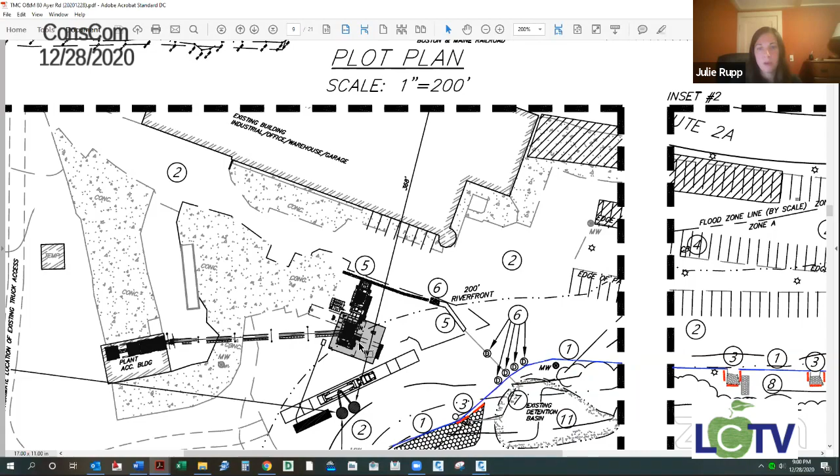Right, that would be a non-allowable discharge to stormwater. It's not going to stormwater. Right - do you have any other discharges, like equipment washing or anything like that, that would go to stormwater? No, I don't believe so.

I would definitely take a good look and make sure you have a thorough understanding of their operation, because a lot of times folks aren't really aware that they have a non-allowable discharge to stormwater. There was some discussion with operations by the plant manager - he told us he had made sure everybody understands that's the only place they can do washout, because he's fairly new on the site and they had been a little loose with that in previous years. He made sure everybody understood that is the only place they can do washout.

Yep, and a good way to communicate that is to tell them that's a wastewater - that would be considered a wastewater under NPDES. Okay, yep. And that there's other activities going on the site, like the barge storage.

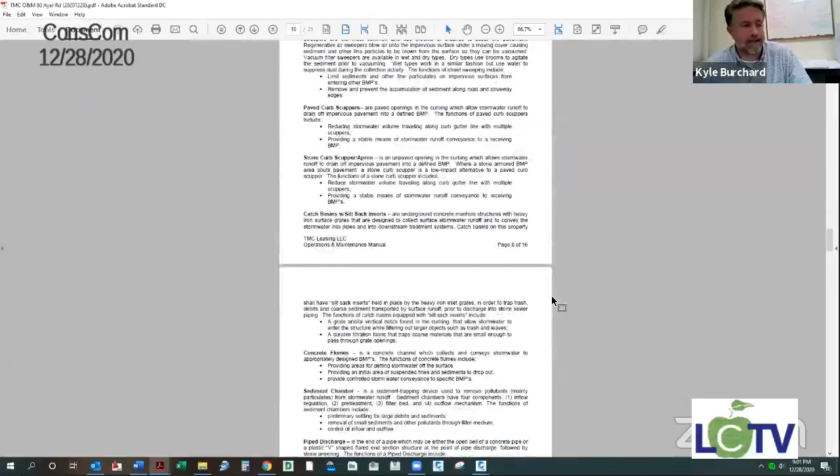So that is something that we included in the O&M. There's kind of a tail end section that, if I may scroll down to, I just called operational industrial maintenance. These are factors that aren't directly associated with stormwater discharges. However, they can affect them, and it's important to have policies in place that deal with that.

First being snow storage, also spill containment, since there are dry materials on the site. The trucks are very efficient, so they don't typically spill any concrete anywhere, but they have procedures in place for that. And then, of course, there's discussion that came from the commission about the marine equipment and protocols for cleaning that equipment.

Wherever it's pulled out of any saltwater environment, then logging that so there's a paper trail of where it's coming from and how it's stored on the site, to make sure that area is inspected as well, so when it comes on the site they know what's coming onto the site, and if it's not adequate, they are able to clean it. It's substantially cleaned where it's pulled out, and then it's monitored wherever it's placed on the site.

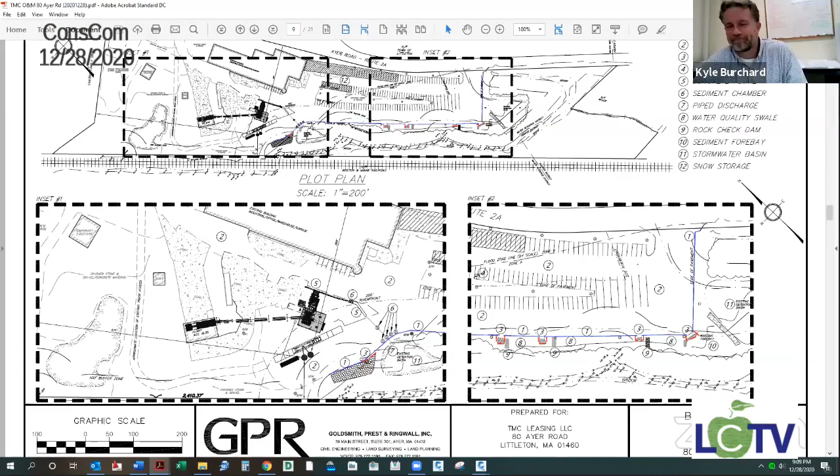We'll move on to the Cloverdale Conservation Land Management Program plan.

Somebody going to speak to that? Yeah, that was me. This has been an ongoing issue where some of the abutters have complained about what's been happening at Cloverdale. I think it's gotten to the point where it needs to be put in writing, which gets difficult because the more you put in writing, the more you find yourself trying to cover every possibility. I sent you what I'd started to sketch out, including a map.

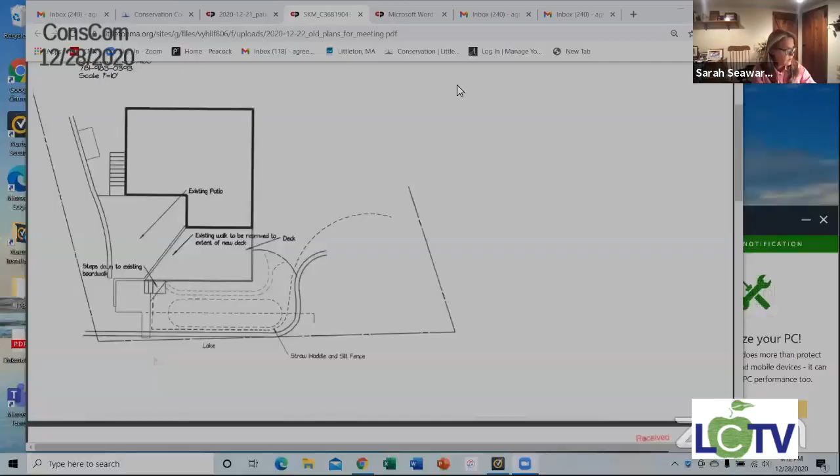I've broken it into, I think, 9 sections. I think that outline was great, and the map was helpful with the resources noted as well. I think it's a live document, so I don't feel it has to delve into all the minutia, but I feel it's a good live document. I don't think I have it on here anymore.

One more thing here. I've been through this with Jim, and he went through a lot of things Cloverdale could probably use, which aren't in here, like putting in a bench or some of the more routine stuff. I was trying to keep it fairly generic and yet cover everything at the same time.

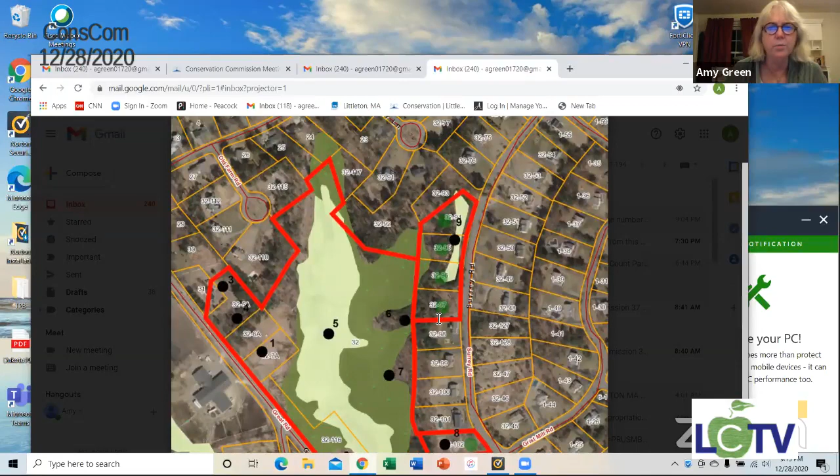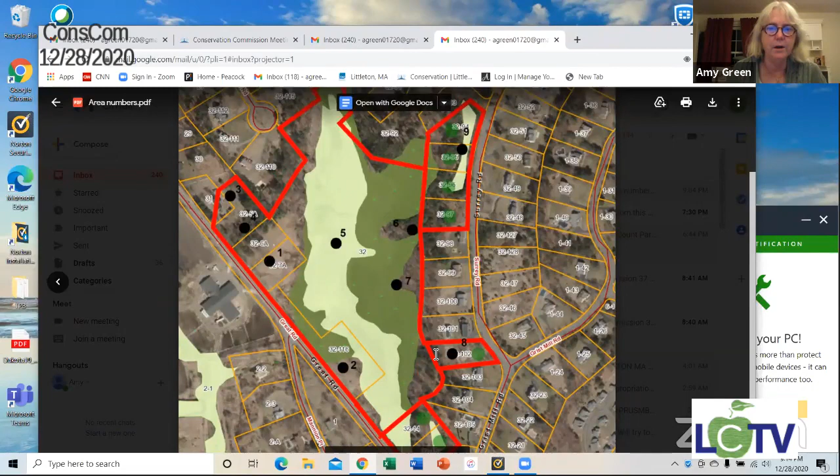I also wasn't sure about these areas with the green dots down here, which are sort of part of Cloverdale but are town owned, not really controlled by the Conservation Commission. This area up here, Area 9, includes a big detention basin the town's supposed to be maintaining and probably doesn't. I don't know if you want to talk to the Select Board about how they may or may not want to use those lands, and these two down here, most of which are wet. There was a trail created out to Surrey Road, which the Select Board had initially said was probably a good idea to get the neighborhood in there. So there's a trail through this piece of it.

The only other thing I wanted to comment on is the surveyors, and this up here in the top left is messed up. I'd have to redo the whole thing to fix it, so I didn't bother. The surveyors had done these areas in here and had not done this stripe here, so I asked about that—that was the second round of survey. And that property line is a lot further northwest than we thought it was.

It appears, I'm assuming it's from the abutter, there's a lot of stuff in those woods, including paint cans and chairs, and they have some snow fencing up, which I assume they put where they thought the property line is, and it is not. They have a little fire pit back in here somewhere, which does look like it's on their property, and a huge cross culvert. Jim, you'd mentioned this one before, that comes through out there as well. So there were some discussions we had about those intrusions as well.

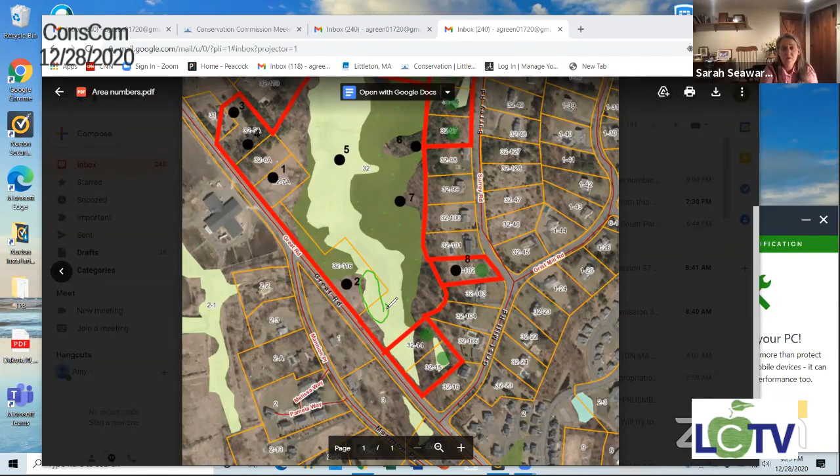And, you know, it's going to grow back, but at least it's a way to control the invasives rather than treating it with chemicals. I would support it if you can do it safely this winter, that would be great. Yeah, in fact the year we had the big snow, 2015, I was mowing it in the middle of January before the snows started. The ground was frozen, so I was able to mow right out onto the ice almost. So it pretty much eliminates all of that low shrubby growth.

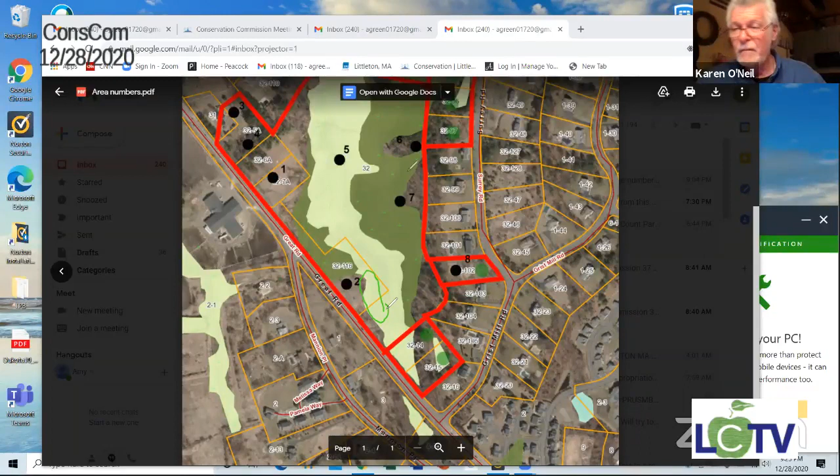Do we need to have a vote on that, Amy, or just I don't think so. This was just a maintenance, your initial input, and see where we're going with it.

Yeah, I would just like to add that I would like some kind of a plan so that I know when I'm allowed to mow and when I'm not allowed to mow, especially in Lot 5A, where I'm being scrutinized a lot. It was in a meeting in 2018 that I was asked to stop mowing that area, which I did. I continued mowing the 25-foot buffer to keep the invasives from encroaching onto my yard.

But I haven't mowed the rest of it, and now the bittersweet and poison ivy and everything is really taken over. In fact, when we did the site walk, it was pretty evident to the members that were out there, to the commissioners. And that's just continuing to take over the trees there. So I would like that to be in the plan so that I could at least mow that once a year.

Yeah, and it also looks like we control a lot more of this, which has a lot of invasives in it also. Yeah, and that has a lot of deadfall too. Yeah, I can get the trail crew or the stewards to clean that up.

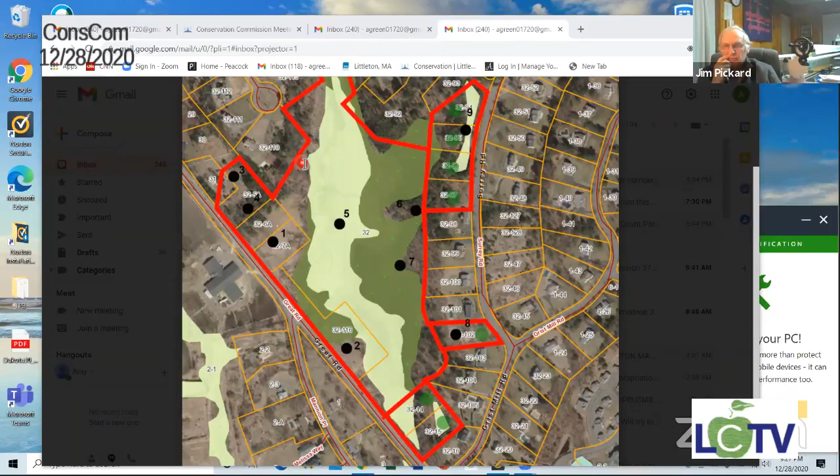So it'll make future mowing a lot easier because I won't have to dodge around dead branches and trees. It almost seems like it needs to be mowed more than once a year if you're trying to stay ahead of it. Well, I agree with that, but I'll go along with whatever you guys decide. We'll have to think about this area. It's pretty wooded and shrubby, and I would hate to keep mowing it and clean out the deadfall, which has a purpose. But we can walk it and take a look, Jim, sometime.

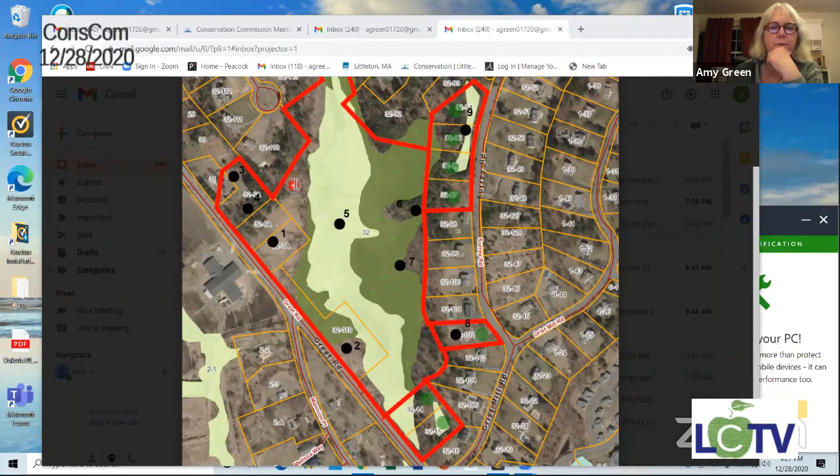And one other thing we were going to do, Amy, was mark the trees with the boundary markers. I've done it along my property line out to the street and along the street down to the parking area, but I would prefer to do the rest when you are with me. Yeah, I was quite surprised by where this was. I think it's like 40 feet from that corner. The assessor's map shows that it comes right where you have your cursor, but it's more like over here, 30 to 40 feet north of that.

So it sounds as though it would be good for some of the commissioners to go out and see that new line as well. I think that would be a good idea, yeah. Okay, all right, we appreciate your time and good luck mowing.

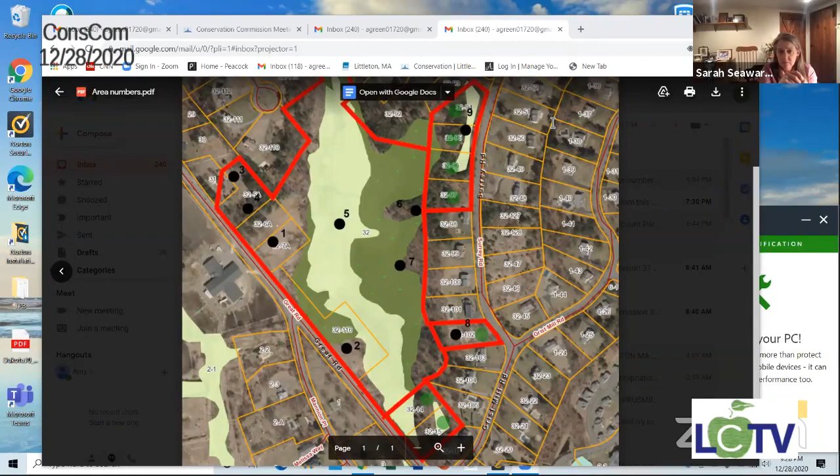All right, thank you. Happy New Year. Amy, I'm gonna scoot, so if you could make note that I signed off. Oh, thank you, yep, okay. I gotta speak to you guys. Happy New Year, happy New Year. We still got a quorum with you leaving?

Yep, public hearing, notice of intent, 83 Mill Road, U 38260, Mass DEP file number 204-9XX, replacement of a failed septic system. Who wants to speak to that one? Well, that would be Ted Doucette, but I don't see him, and he's not sitting out anywhere.

Good night, everybody. Hey, Andrew. So can we do the 9 o'clock one? I don't have a clock in front of me. Yes. Okay.

Continued public hearing, notice of intent, 9 Scott Road, U 49270, Mass DEP file number 204-9XX, paving driveway. And I guess there's another one for 11 Scott Road, U 49280, Mass DEP file number 204-9XX. That was kind of a discussion item, wasn't it?